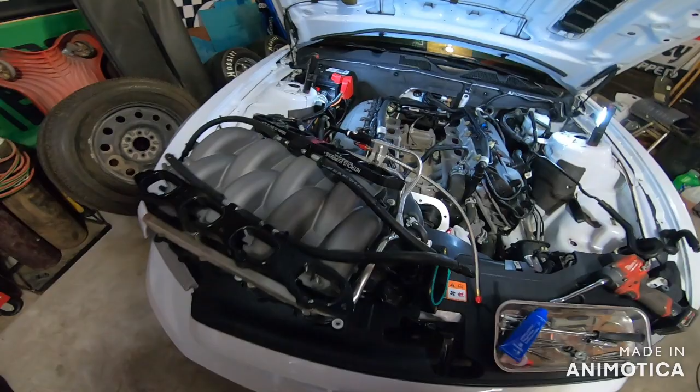Making a little video about the Nitrous Express direct port installation. Not any information out there on these kits so far. Part number NX956, which is just the plates, no solenoids, no bottle, no line, which I already had a nitrous kit on here, so I only needed this conversion kit.

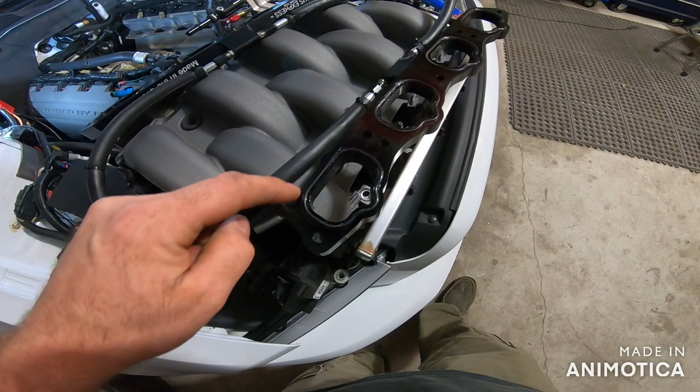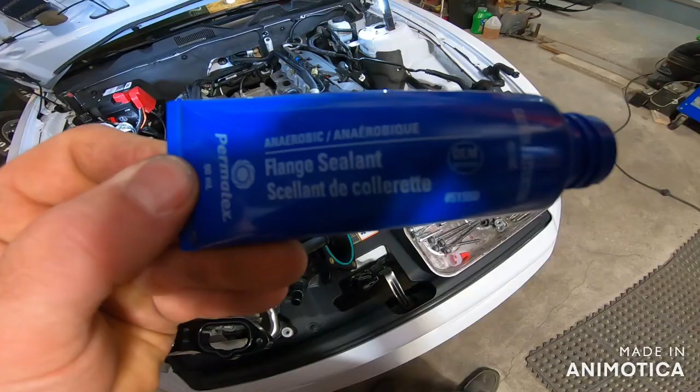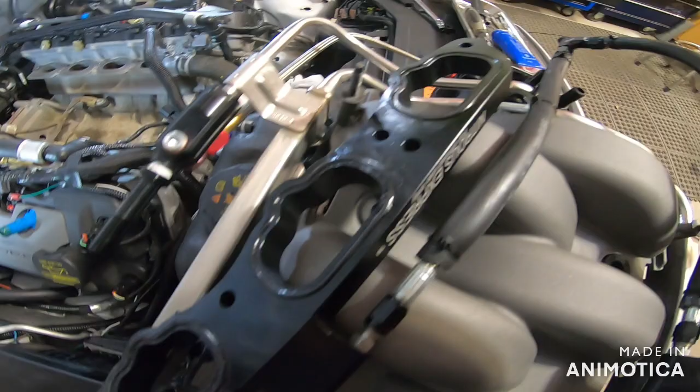One issue I've run into is on these O-rings. They are just round O-rings. They're not form fitted. They do not want to stay in there very well. So I use this flange sealant. It's good for tight applications. It's basically like a grease, a tacky grease. But anyways, a little bit on the O-rings and they stay in place now. And I've already loaded up my jets.

One other downfall to this kit I'm finding is the jets are in these plates. Now these plates are underneath your manifold. Kind of makes it difficult if you want to make any jet changes, because you have to pull your intake manifold off, and just doesn't make it very convenient. But anyways, when it's all said and done, it will be basically 100% hidden, which I like that aspect.

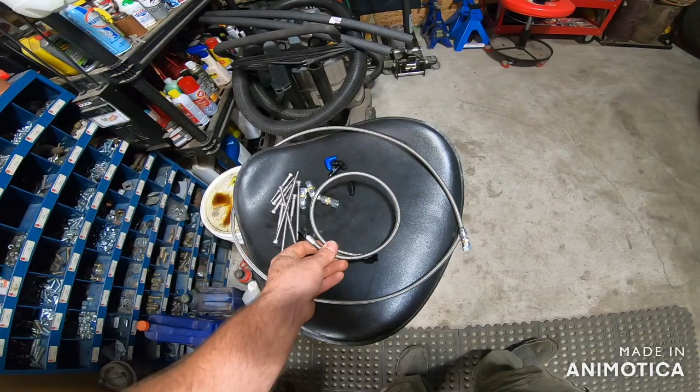But anyways, I loaded up my jets already. Got the nitrous jets, the fuel jets, and then they Y together where I will connect lines to go to the solenoids. The kit comes with two of these 2-foot lines. You could probably make it work, but I did buy just a length of 1/4 inch PTFE stainless braided line and some reusable fittings so I can make my own lengths. But basically I'm to the point where it is installation time, and we'll see how it all fits.

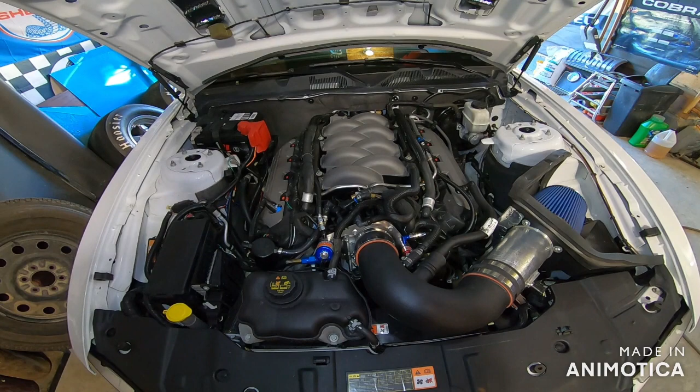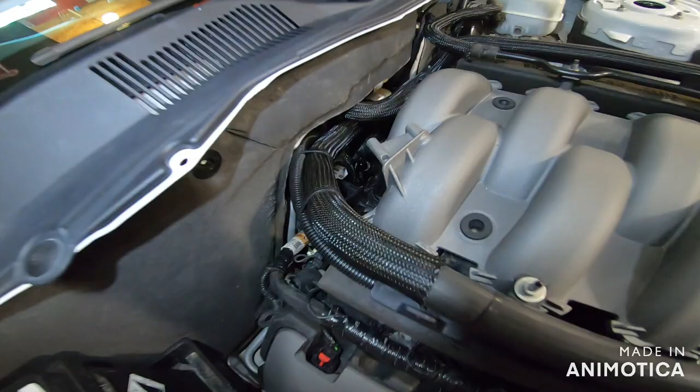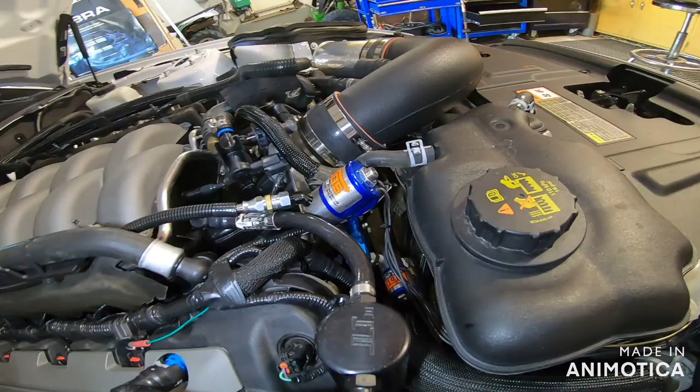Finished the install of the Nitrous Express direct port nitrous plates, part number NX956. So as described before, you have your nitrous lines that run from the back. You can see the Y and my line, which follows up, which goes into the nitrous solenoid. And then the fuel, it's pretty hard to see with the intake on, but it comes out from underneath the throttle body and it loops around.

And for now my fuel system is just tied in on the factory fuel rail, which I'm contemplating going to a standalone fuel system. Nitrous Express also makes a pretty nice product for that which would fit in the battery tray. It's got its own pump, regulator, everything on it. But for now it's installed. There's no leaks, no vacuum leaks. It's a matter of going out and data logging now, trying it out, make sure everything's good, and I'll finish the video with that.

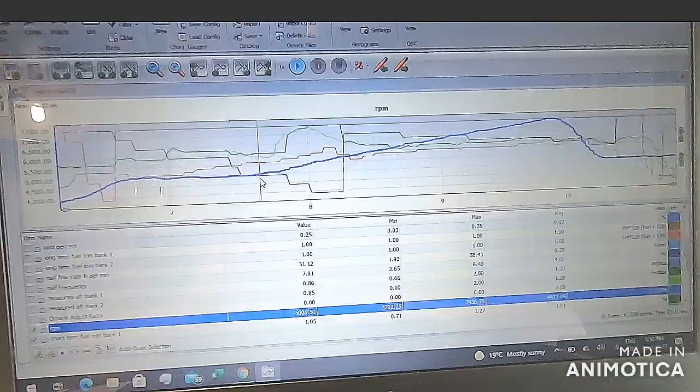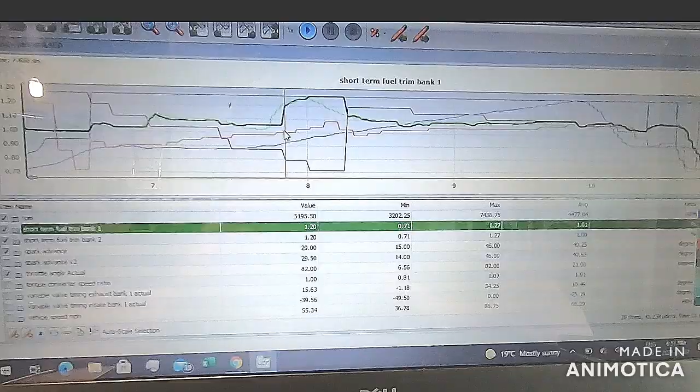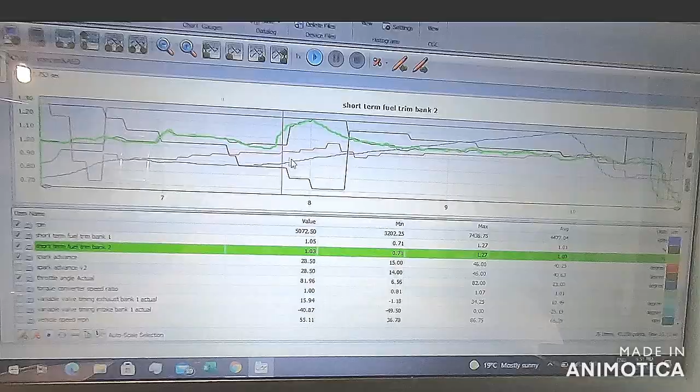So at that point everything's good. I did a pull to 7,500 RPM, but I did notice on the hit, right after the hit there, my nitrous engages at 5,000 RPM. I went pretty lean for about 700 RPM, and that was bank 1. Bank 2, same effect, not quite as late. It seemed to go lean sooner, and it also seemed to richen up sooner. But nonetheless, there's about a 700 RPM window there of where it's running lean.

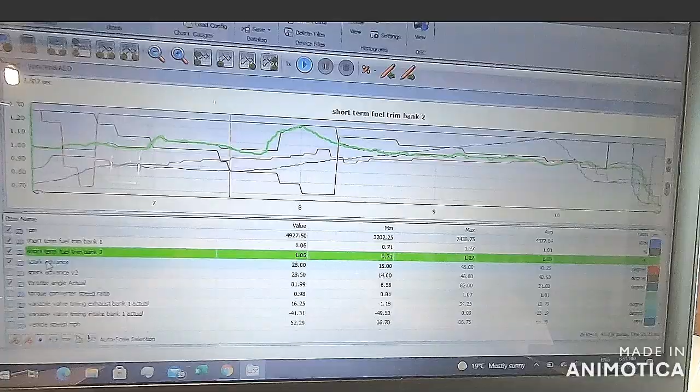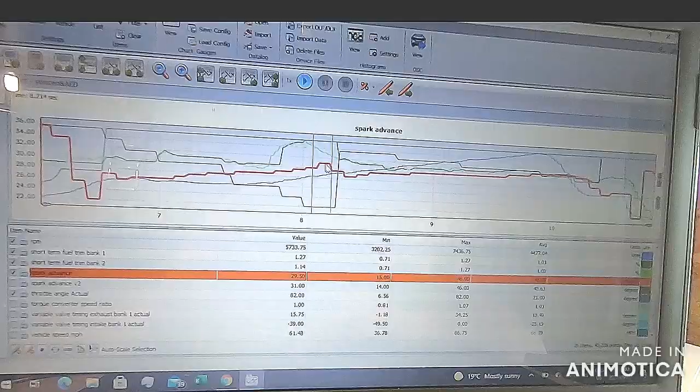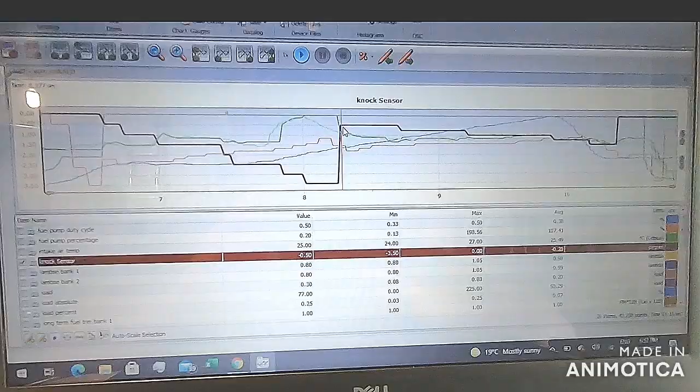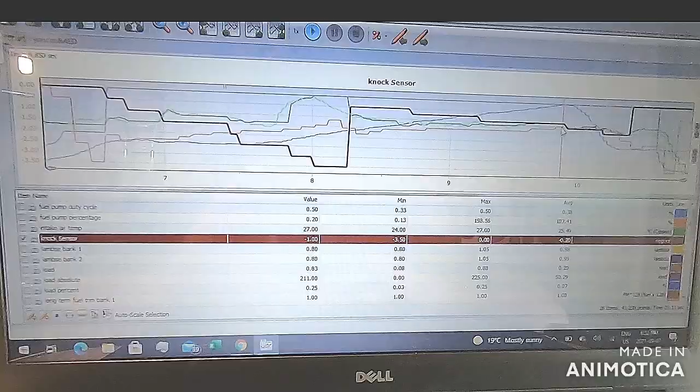Now here's my spark throughout the pull. Spark was good throughout the pull. Kept adding timing basically the whole way through. It hesitated here a little bit right after that lean spike. I'll show you on the knock sensor here. So on the knock sensor, I had a little bit of activity here on knock right after that lean spike. But it stayed in the negative, which was good because it wasn't that lean, wasn't knocking that hard to rattle my pistons or have detonation. Stayed negative throughout the rest of the pull. So everything seemed to work fine. It's just a matter of getting rid of that lean spot right after activation.

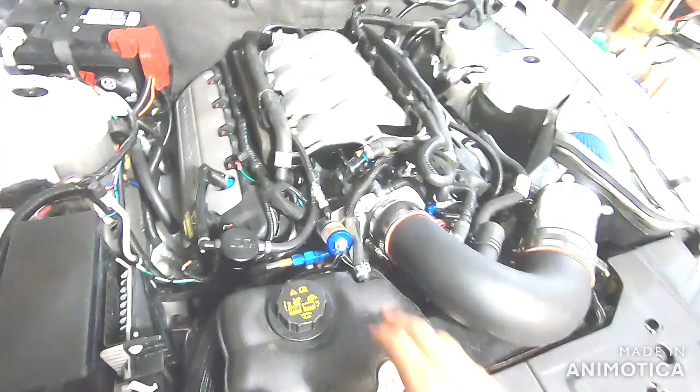Last part to this video will be how I overcame my lean spike. Given I have this nitrous controller, NOS mini controller, it's capable of running 2 channels, so I have one channel hooked up to my nitrous solenoid, the other channel hooked up to my fuel solenoid. Now as far as programming goes, I'll show you what I got it set at.

So there you have it. It should work. I'll do some final testing tomorrow.